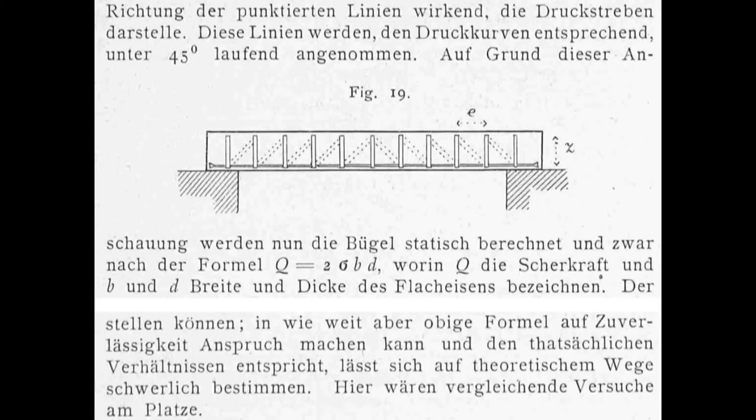I have to think about that. And maybe we can take that as a motto for this evening. It came to my mind that Wilhelm Ritter, professor at ETH, published that scheme in 1899 as a possible analysis of Hennebique's reinforcing system for reinforced concrete. He said he imagines a truss with diagonals in the concrete under 45 degrees, and finally he said it would be good to prove that with some tests. So this was thinking, this was speculating. And finally he anticipated today's standard. So I think this can be an illustration for the power of thinking in the sense of Bodenheimer.

Applying this to the design process, I tried to schematically represent that by these three elements: thinking, writing, and then precisely drawing. That's one possibility. On the opposite, sketching, following visions, dreaming - two completely different ways of obtaining a design, or designing by convention. This is not bad, this is something we often do. You take a precedent, you adapt it to the problem you have to solve. It's good for that way if you know history.

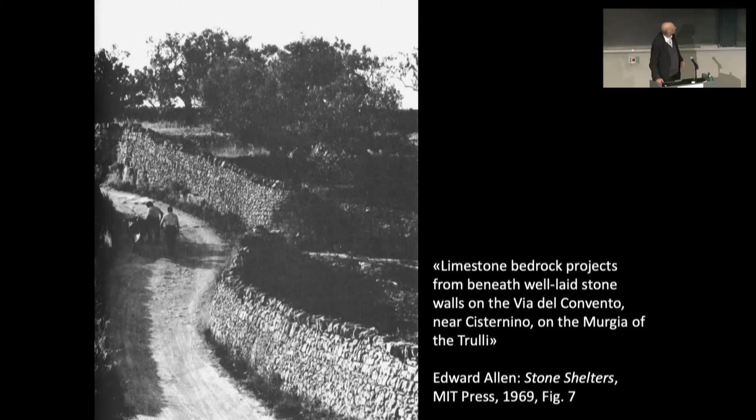Look at this strata in these walls, and this is one of the walls I analyzed for the Rhaetian Railway. Also limestone, stratified with always one smooth surface and one rough head. And look at that corner, how this is built and how it matches the natural rock face, and how the upper part is done with these interlocking vertical stones. I'm very passionate about such things.

Another very beautiful photo by Ed Allen from Italy, this interplay of road and landscape. I will come back to that photo at the end of the lecture. And also that has some familiarity with some of my own works, these stairs and these transitions, not always very clear between the built and the natural. A great book, these stone shelters.

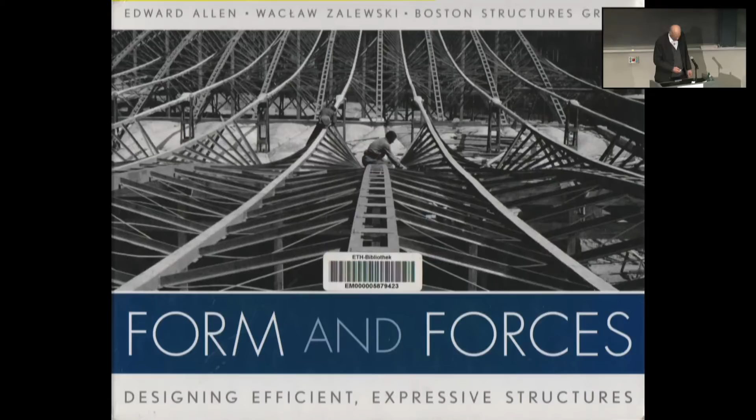Coming back to form and forces, I feel highly indebted to that culture established by Allen with this passion for rationality. I think there has been some changes in the attitude of engineers around 1980, which were also responsible for my shift for some years to the architect's office. And I maybe can illustrate that.

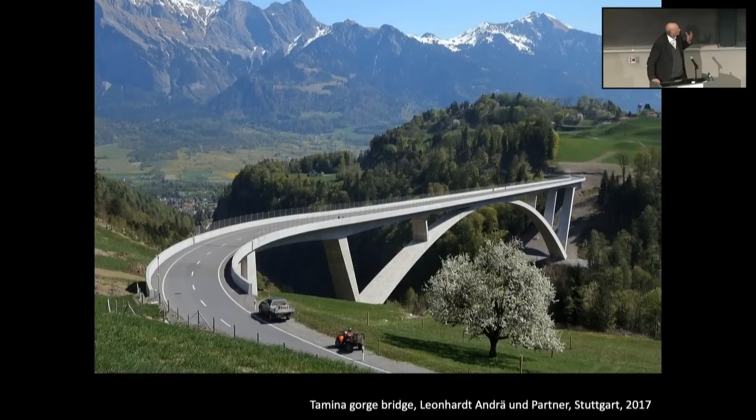This is a bridge not far from my home, an immense arch bridge, spanning 265 meters, built by cantilevering out in successive phases in concrete. This is the moment where the two cantilevers meet. It was the result of a competition, and the jury praised the slenderness and the transparency of this design. And certainly this is an impressive work.

Looking at the longitudinal section, you see from here till here, the arch has the section of a full rectangular concrete section, almost 3 meters high. The arch has a continuous curvature. You have an immense span from here to here. So, looking at that, it's very clear: there was a will to form a priori, which was then done by the calculating engineers to realize that intentional form. So this is a piece of art.

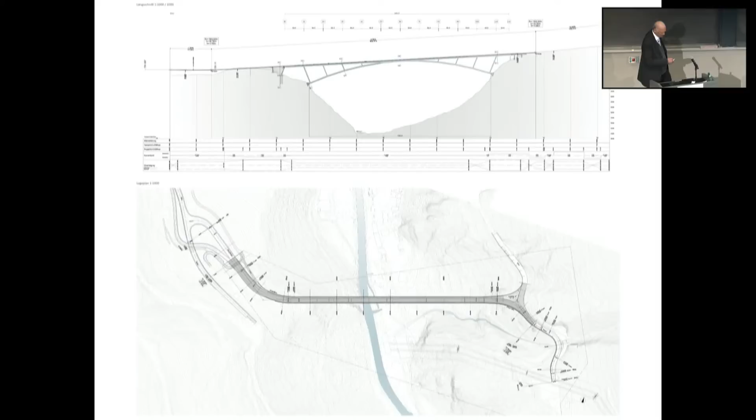Another bridge, which at first gaze may look similar, but only at first gaze. It was the result of another competition last year, also a big arch bridge. The position of the bridge could be chosen by the engineers. And so, happily, Schlaich Bergermann and our firm won this competition with the shortest bridge of all the entries and the longest span. This is already a concept.

Shortest bridge, longest span. This implies that the impact on the landscape is very small, whereas other projects had a shorter arch but a longer bridge and a bigger impact. So the jury decided for the smallest impact on the landscape, but looking at the bridge in detail, it has significant differences to the Tamina Bridge.

It's of steel, lightweight steel. It has a polygonal arch. And everything is conceived to the uppermost rationality in this position of the bridge.

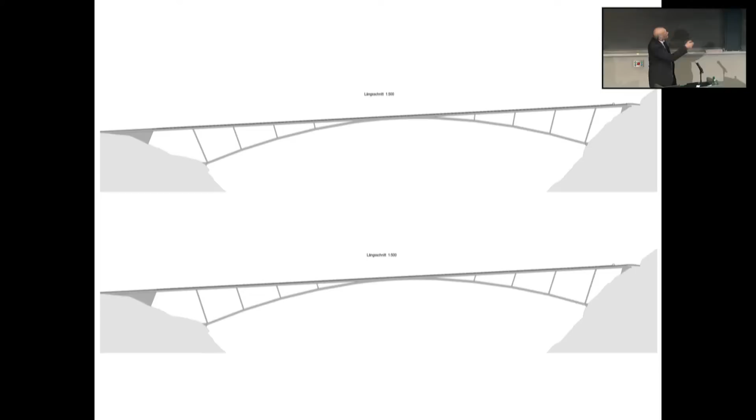Next week, I will have a serious debate with Andreas Keil from Schlaich Bergermann, because Keil wants these pillars to be parallel. I want them to be radial. And Ed Allen certainly will help me in that discussion. So, another example to show this tradition which goes on.

Now it's high time to present a little bit what we are doing. This is Switzerland: Zürich, Chur, St. Moritz, Bondo - we will come back to that place - Poschiavo also.

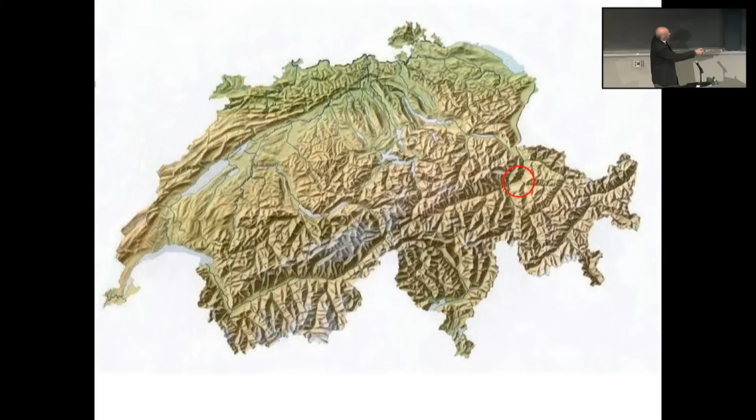And these are my partners. Gianfranco Bronzini on the right, we've collaborated 30 years. Now Peter Henry, the youngest, 45 years old. Josef Dora, also a very long companion. Myself, 66 years, the others 55 years. This is a good distribution of age to guarantee a certain continuity.

So for today, I thought in a first part I want to have a retrospective chapter on personalities which have influenced me during my lifetime, and I will present one project of each of these three people which is important for me. Then we will make a short intermezzo, and in the second part I will present some of my own projects. And as I said in the beginning, as I want to talk about thinking, this can be very short - I'll just show the most important aspects of these projects.

And then finally, the Orrido di Cavaglia and the Bondo infrastructure - these are two projects that deal with landscape, which I would like to present in a bit broader way.

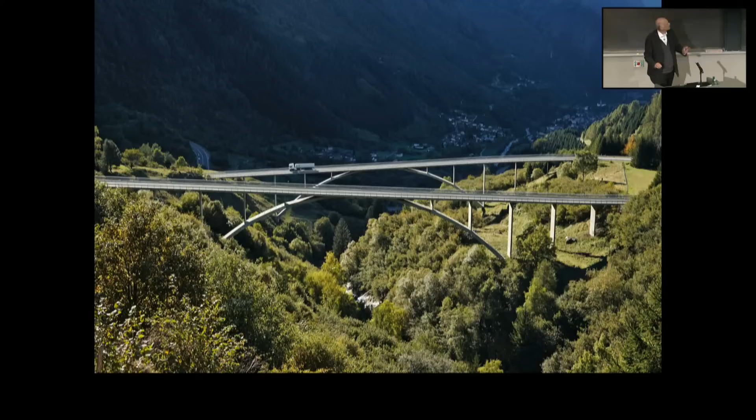Okay, I used many photos from friends or from the internet. Christian Menn, you might know as the engineer of the Bunker Hill Bridge over the Charles River. He was professor at ETH, he was my professor too. And in the 1960s, he invented this elegant arch bridge system with a post-tensioned hollow box stiffening girder on top and a very slender, rectangularly sectioned arch.

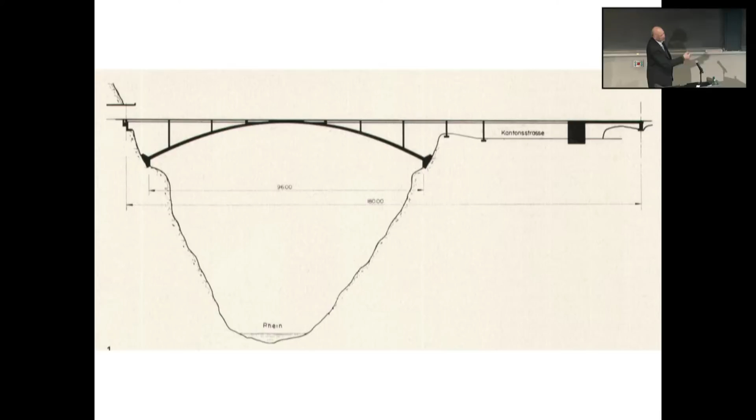He said a big challenge was this crossing at a flat angle, a big span which dimensioned the hollow box section. And then he took this section over the whole bridge and added the arch, which is stiffened by the hollow box section. As there is this curvature in plan, he shifted these walls as much as possible away from the springs of the arch to avoid too much horizontal eccentricity.

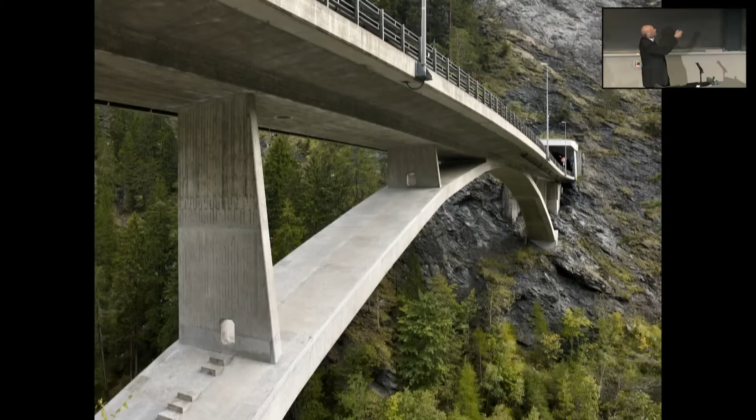You see it here, this is the last pillar, asymmetric, and after that the driving way turns left. And on the other side it's similar. And now he wrote something very important - these are the different sections of this bridge.

He said that once you have found the relationships between all these different elements - arch, pillars, and driving way - then the form-giving process reduces to choosing only a few parameters. And this is something which I consider as conceptual thinking, which has very much fascinated me as a method of working.

Robert Maillart, pioneer of reinforced concrete, he built the first deck-stiffened arch bridge in concrete in the world, in 1924.

It bridges an artificial lake. You see how high the water level can come. And for this reason, Maillart conceived all the submerged pieces very massive, and then he put this absolutely slender arch above it. This was really an invention that had a large influence until now.

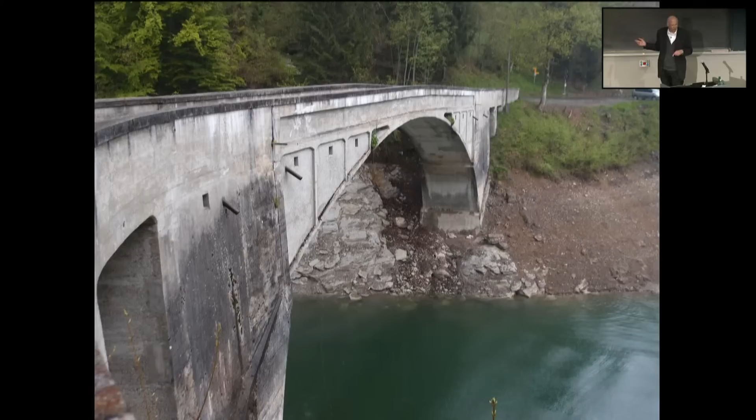And only after that, some opponents came and said, hey, this is an important work, you cannot demolish that. And then followed a struggle for years with court and anything. It ended up that our office got the job to investigate the feasibility of a restoration of the bridge.

This is the Lake Wägital with this bridge called Schräbach Bridge. This was the first big artificial lake in Switzerland, maybe the biggest also in Central Europe, with this huge dam going deep down into the earth. A very ambitious project. There were architects from Zürich, the Pfister brothers, who designed the crown of the wall. There was the director of ETH's engineering department, Arthur Rohn, as a consultant. So really a great work, and Schräbach Bridge was part of that.

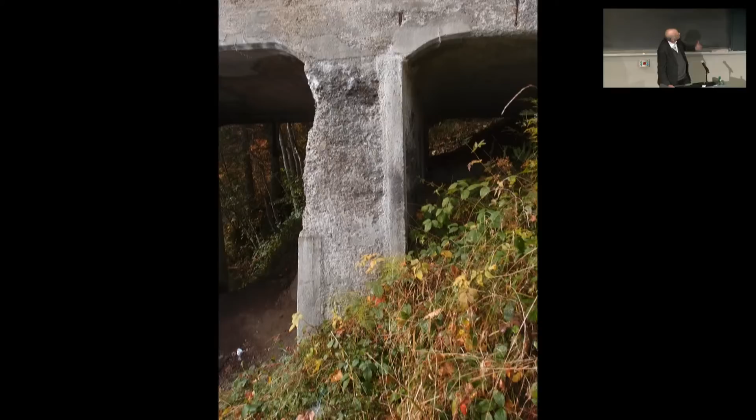I inspected the bridge, spent many hours there looking at the damages. I mean these walls, these are bricks. They have no structural action.

Everybody agreed that a restoration would be the possibility, the chance to bring this bridge back to its original state, to enlighten the whole structure. That was clear from the start.

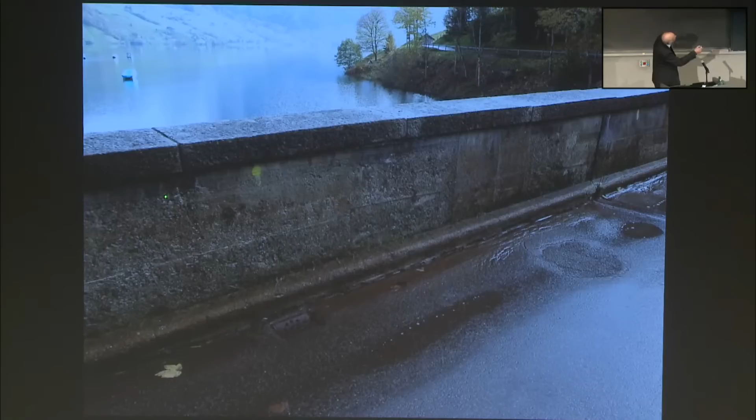I found some intriguing things. You see, there is a line. It comes back here. Along this line there is like a band, 7-8 centimeters, of hammered concrete. It reappears under the bridge here, very clear. I realized this is concrete from 1924, and this is concrete from 1932. And to have a proper junction between the two materials, the joint was hammered to make it regular. It goes on and on through the whole building.

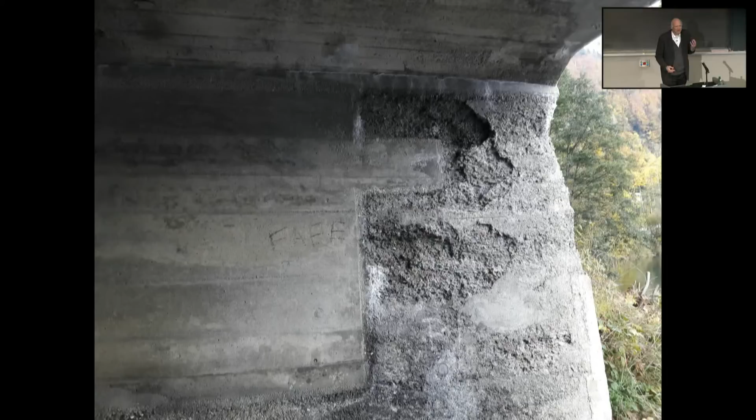Somehow I was fascinated by this pattern. Then the look from outside. Studying the reinforcing drawings, I realized the arch has no upper reinforcement. That Maillart did never again. This is a bold decision, and even if you could calculate that it could work, this is not such a good feeling. It made me a little bit scared.

And then you see these cracks. And somehow at that moment I was not so sure if this is a good idea to remove these walls. Of course, they are not structural, but maybe rather psychologically, it helps to give a certain trust.

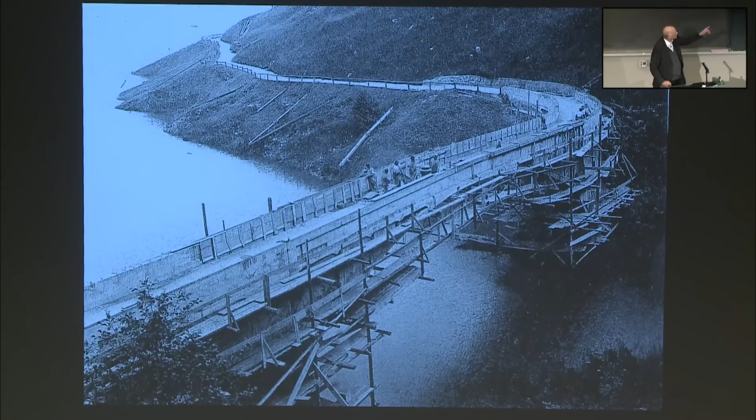Then the archivist of the power station found material in his archive. Look at that - this is 1932. This girder is in a formwork. This explains the line I showed first. I mean, this was surgery at open heart. You have this thin arch, and this is the stiffening element, and they worked on the stiffening element.

They take away all the bad concrete. This is proof that the drawings are right: one bar, diameter 12 millimeters, every 30 centimeters. That's not very much. And then this drawing, not by Maillart but by the power station company, shows a wall on one side of the section.

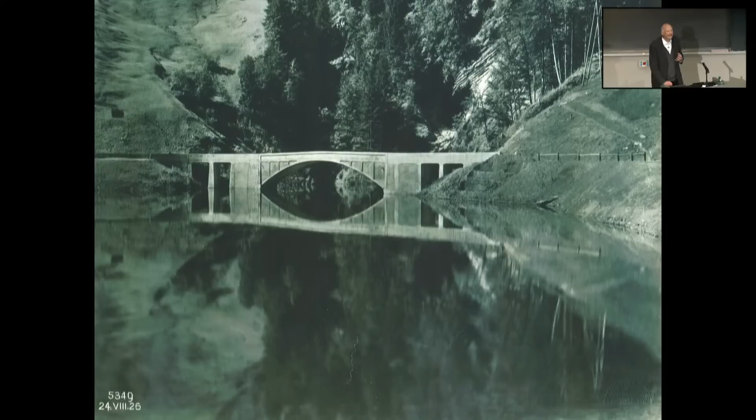And it goes on - this photograph, the oldest photograph of that bridge, August '26. Oh, the walls are already there. Who is the photographer? It's Wolf Bender, a renowned photographer specialized in architectural photography. He waited until the lake was full.

He waited until there was no wind to have the mirroring image of the bridge. And this is not just a photo, this is a tableau. After a while I thought, it's a beautiful image - beside Maillart and his work, but as an image, it's beautiful. This bas relief of the bridge with these walls.

And okay, there are no written documents, but it was clear that was Rohn and the Pfister brothers, because they also had built bridges together at other locations, and they always had this neoclassical attitude. And as I said, this was an ambitious project - they just could not stand Maillart's little pieces. They made it in a decent way, but these walls are there for aesthetic reasons.

And that changed my attitude another way, because this was not accidental - this was intentional, from conservative but good, interesting architects. And as I said before, for structural reasons I was reluctant to remove these walls, but now also for historical reasons, for having this bridge as a testimony of the discussions in '25, I came to the conclusion this must stay, this must be polished, this must be better. In the middle, these two were missing since '32. We thought of re-establishing that, and then I started to think...

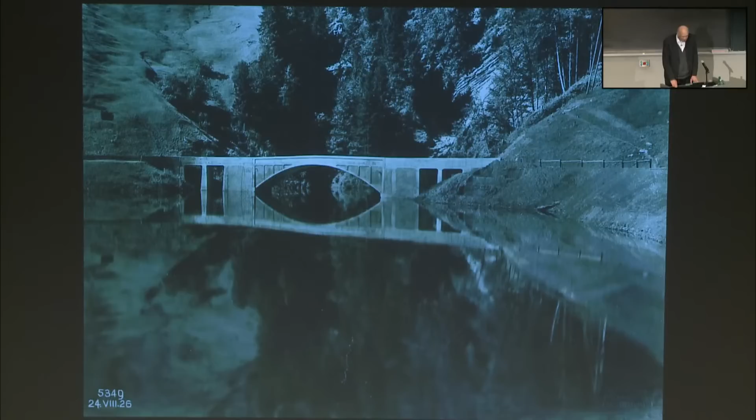And thinking brought out that.

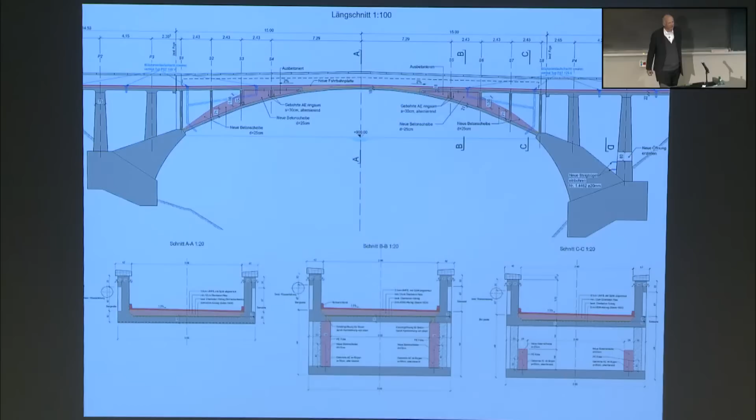These are the walls, and it's not a problem to make these small walls out of structural concrete behind these aesthetic walls. We transformed the bridge into a Salginatobel system, which with a very small amount of concrete almost doubled the load-bearing capacity of the bridge. And it had the advantage that we did not have to care about the balustrades anymore.

We tightened it. There was an infill of concrete, I don't know why, but we exchanged that - there were some bad elements in it. We replaced that and covered it by an ultra-high strength layer of concrete to make the whole thing watertight. This is some of the most important thing.

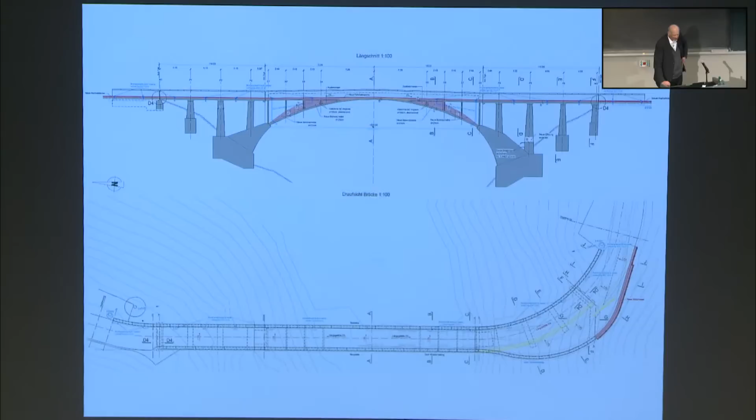As the owners of the bridge wanted to use it for transports of wood from the forest, they had a problem with the narrow curve, so we enlarged that curve on the south side. On the not so visible side, that was just a tribute to make the bridge usable again.

And very important, always the mock-ups. My wife was a primary school teacher, and at the age of 30, she made an apprenticeship as a furniture maker, and after a while she specialized in model making for our office. She makes such great models. So we tested the support of that enlargement on the model.

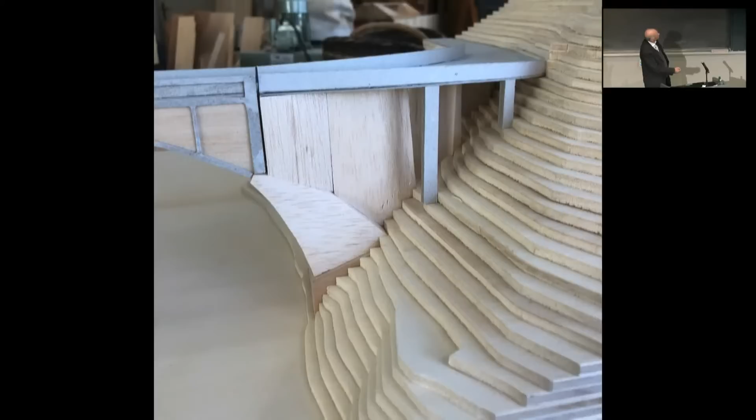3 additional pillars looked not very convincing. 2, neither - that's not good. Enlarge the existing pillar in the background is better. Enlarge it with a skew face is even more better.

So that was it. I presented the model to the conservationists of the canton and to the clients, and they all said, oh, this is a very interesting proposal. And so, I also showed that the cost of this was half of the new bridge. So we could do it.

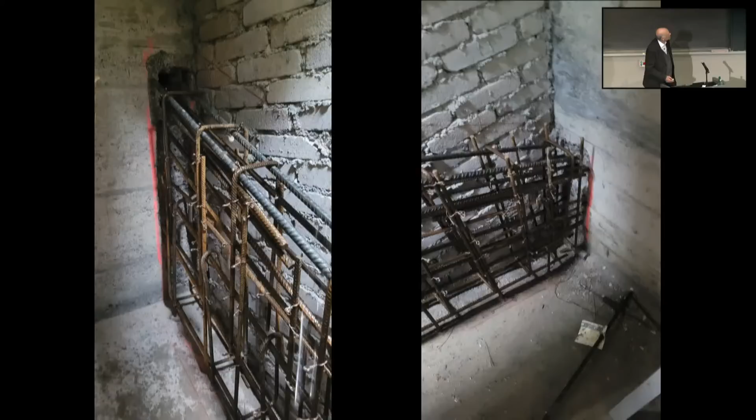Bridge restoration in Switzerland today. I mean, I got a letter from a colleague saying what the hell do you here? I mean, it looks so rough. It's not what people maybe expect from you, but I mean, we saved the bridge. We strengthened it, we tightened it, we saved a lot of money, and we said, this is part of the history of the whole thing.

It's maybe still not the most beautiful thing you can imagine, but this doesn't matter. It's such an interesting story, also about Maillart and a certain failure, and what develops out of this, and this kind of enemies in the aesthetic sense.

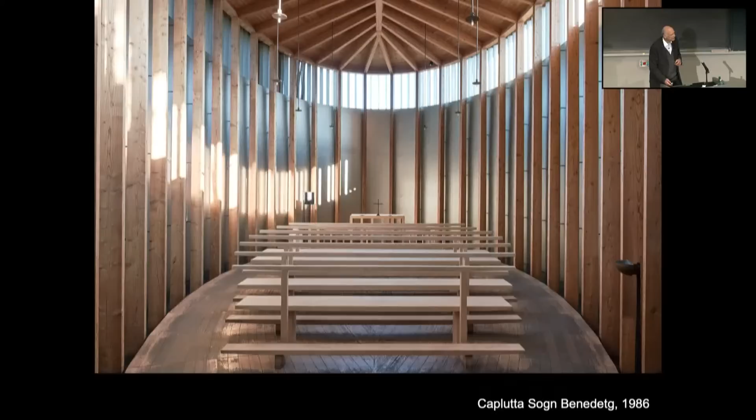It was a competition. He drew the plan by hand, and I proposed to follow a mathematical function for this plan. And after some debates, it ended with the Lemniscate as a directrix form for the plan.

It was 1986. I had my first personal computer. I made a spreadsheet for calculating the length of the Lemniscate. It took 1 hour to calculate that at that time.

And then we divided that length into 37 pieces to get a regular distance of the pillars. I did the work twice because after a while we found out it's not the pillars which are important, but the windows. So now the windows are regularly spaced along the whole length, and this explains that distribution of pillars at that point. Okay, so far done.

Now, the rafters are perpendicular to the contour line. This defines the intersection points along the central axis. Then, the incline of the rafters is 1/3, constant for all the rafters. This defines the longitudinal line of the roof.

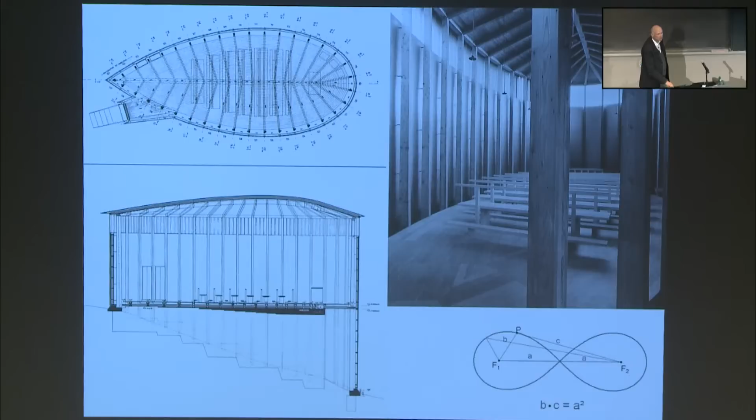Finally, this is exactly the same procedure as Menn did with his bridge. We developed a system of interdependencies, and finally, it was to choose length, width, height, and slope of the roof. And then the thing was fixed. So I think this is interesting - the same way of thinking in a bridge, in a chapel.

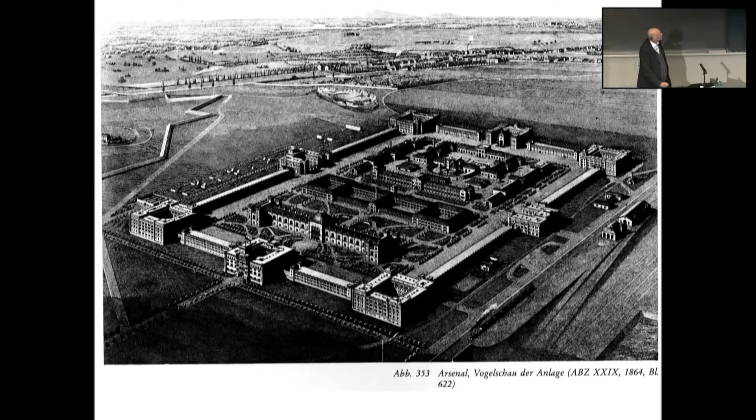Otto Antonio Graf collected all the drawings, all the works by Wagner in several volumes. And one volume is dedicated to Wagner's teachers, Sicardsburg and van der Nüll. These teachers built the Arsenal in Vienna. What follows now is the analysis by Otto Antonio Graf.

From the plan, he comes to the entrance door, and finally, he shows how every rectangle of this door, every hexagonal ornament corresponds to one point in the plan of the whole area. This is interesting.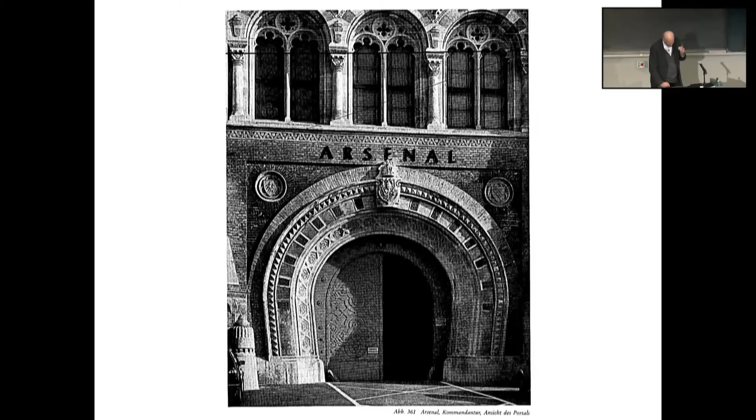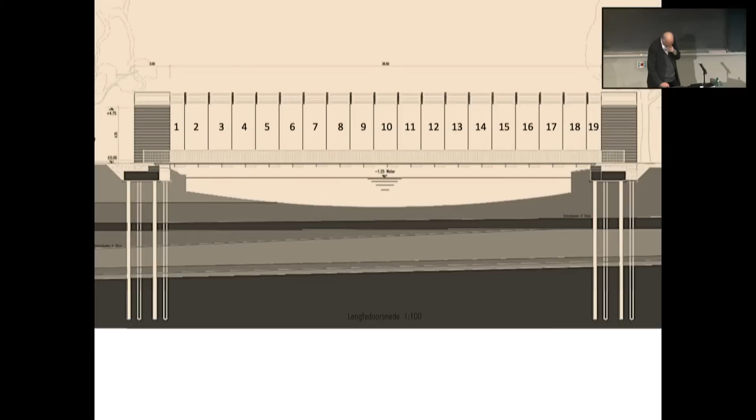I remember when I told the draftswoman, hey, put one piece more, it looks better. But this was all. This was, of course, not a conscious decision, but it's somehow intriguing how you are dominated by things you don't know.

One of these stone slabs, turn down the height, multiply by 12.167, you have the whole bridge. There is an error of 41 millimeters, which you have to excuse, but again, these are things.

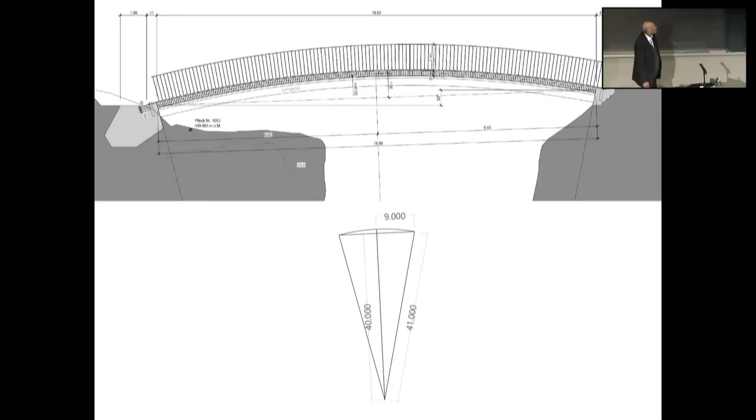The falling water bridge, a slender stone arch. I spent a lot of time determining the rise and the thickness of the slabs and the amount of post-tensioning. Finally, what came out, also, I realized afterwards, a beautiful triangle, 9, 40, 41. That's more interesting than the 3, 4, 5.

A suspension bridge over the Rhine River we built some years ago. Also, when finished, I prepared a presentation. I had rebuilt George Washington Bridge in the scale of 1/12. It would be ridiculous to start work like this, but to find out how deep this George Washington is carved into my mind, it's such a funny thing.

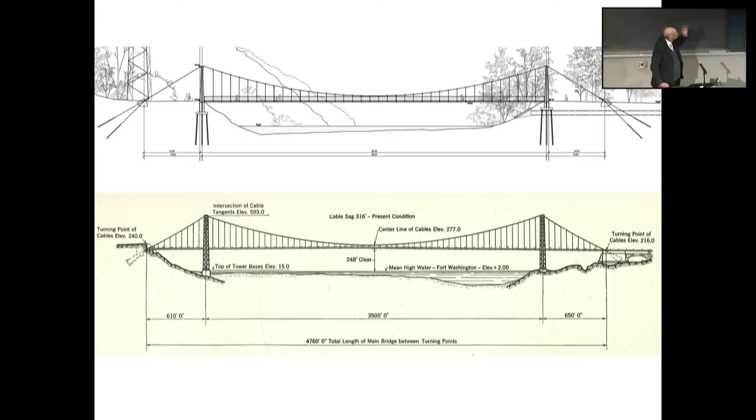Okay, let's stop with that, but this is maybe a conventional design, as I mentioned at the beginning, but conventional does not mean very easy. It was hard work to master all these details, all these different phases of erection, but it also had its qualities, the footings of the stiffening girder, and the cook-in-chief who proudly presents his steelwork fitting together. Okay, so far so good, but I wanted to give some remarks about feeling uneasy.

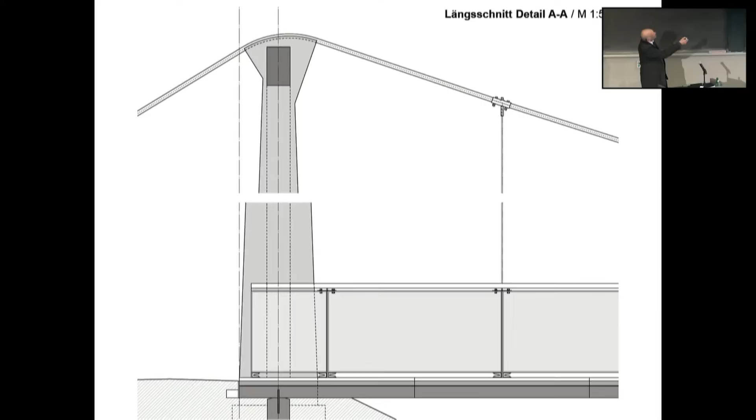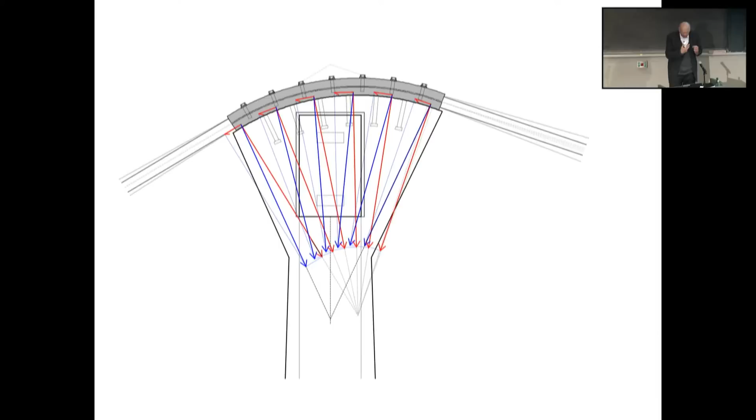This was, at the beginning, the head with just rectangular lines on the cable. Of course, this looks odd. And later on, we found out that the forces, of course, do not go perpendicular to the cable, but there is an amount of friction because this is another slope than here, and so the longitudinal force in the cable changes. So we corrected the shape to these black lines. And still I had the feeling of something neck-breaking, which I could not explain because everything is so clear.

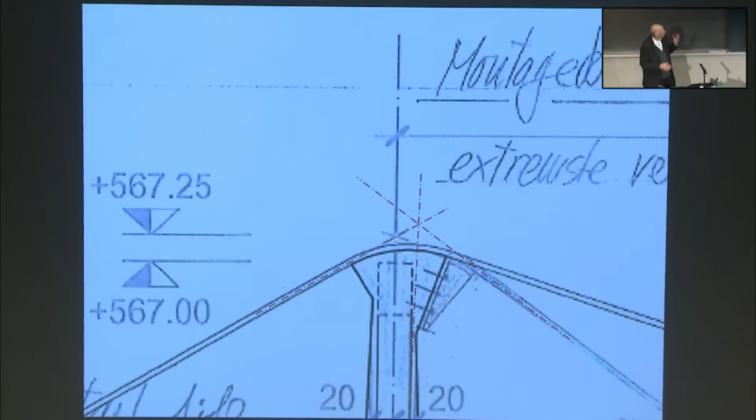And it was only later that I found out that the deformations are very big during the construction process. We intended to put the steel socket here to avoid kinks in the main cables. And now, if you look at that, the intersection point shifts, and the resultant force is outside, or almost outside the section. Okay, once the problem was seen, we could handle it. But this was like something present in some way as an unsettling thing which had to be analyzed and rationalized to overcome.

The finished bridge has handrails at a height of 1.30 meters because it's used by cyclists, and I also was not so sure if this is a good height for a handrail, but as you see, people like it for their elbows.

Okay, last part of this intermezzo: cultural background. It's not only that there is a structural culture for bridges and so, but they can also be background for another type of culture. So the 5 arches here, the 5 arches there, the king of pasta, Pietro Barilla, with his artists.

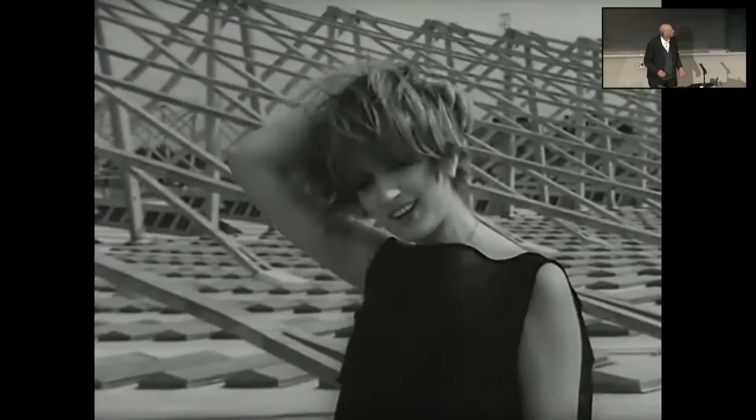Architect, scenographer Piero Gherardi, who designed a lot of clothes, made a film for Barilla pasta with Mina Mazzini as a cantautrice. And here she sings Mai sarà così on the roof of the Fiumicino airport in Rome, a structure by Riccardo Morandi. This is maybe the only country in the world where structures are background for singers.

Okay, now I come to some own projects. The first is a holiday house. There we had to build a wooden roof on a polygonal shape, and we used analogies to reinforced concrete. You see the house, you see the rafters in different spaces. Now the structure goes like that.

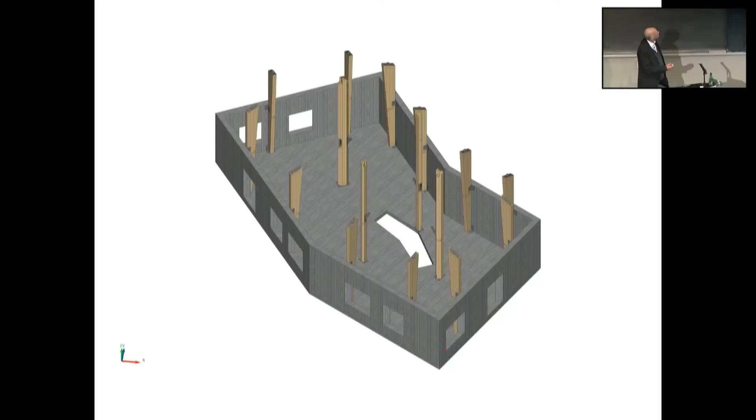There is a concrete plinth. Inside there are wooden posts, walls, a roof structure. The ridges here are not supported because the architect wanted to have free corners. There is a first layer of horizontal beams. Over the supports, this is densified with some short pieces.

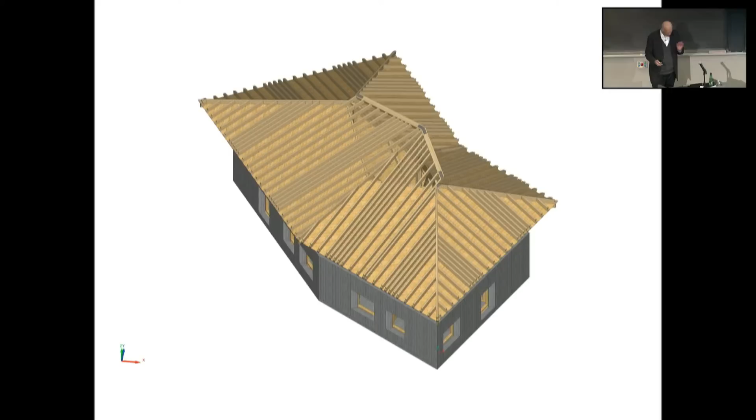Some panels, and then second layer, rafters. Again, the distance is differentiated along the needs of the structure. So this analogy to reinforced concrete is very economic because you put the material exactly there where you want. So this is the inside aspect of this house.

Shell structures in another way. This was a competition with Marcel Meili, Markus Peter. This is the site. On this site you see 8 strong pillars, and over these pillars we proposed a shell structure, not only for the roof, but a shell structure for the whole house. So in section, it looked like that.

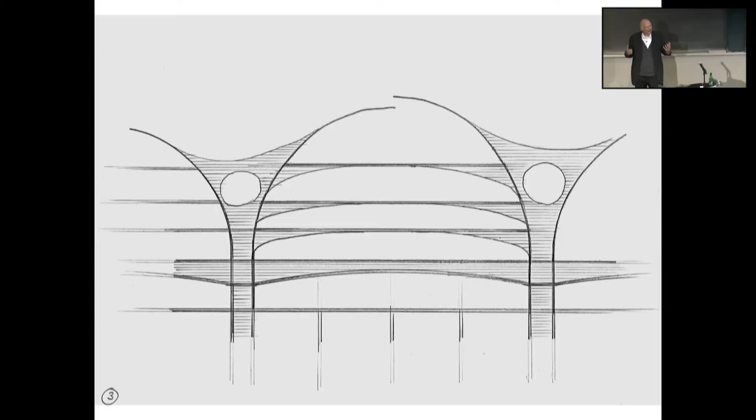I mean, here, everybody speaks about sustainability. And I think all the examples I showed until now were concerned with minimizing material. And also, I think if you take that seriously, we have to reinvent the shell structures in concrete, which are so efficient.

Okay, the plans, the sections. And this was the final presentation. Of course, we did not win. No. The winner was David Chipperfield with a neoclassic, serious building.

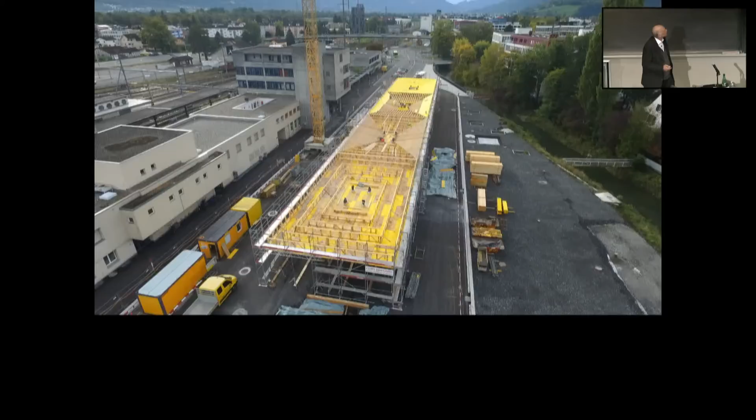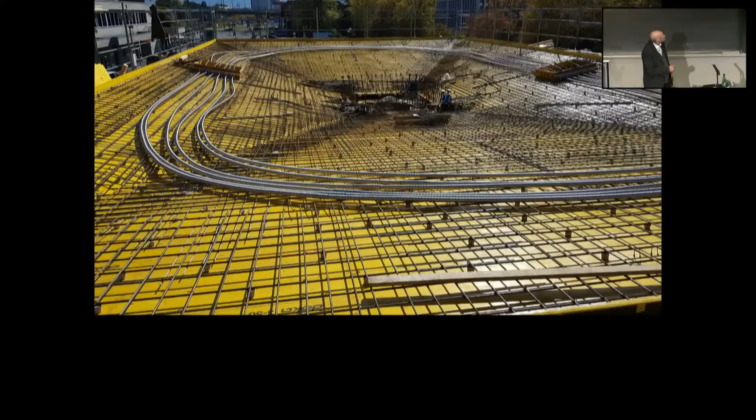If not shells, at least some folded works in concrete. A bus shelter, 4 independent structures, pure concrete, without any watertight layer, because they are independent, they are post-tensioned, they can shrink, they will have no cracks. This is the formwork going on. Reinforcement. Concrete.

Finished. Thin plates of concrete, I think in a beautiful relationship to the station building by architect Max Vogt, who made a series of remarkable buildings for the Federal Railways in Switzerland. Evening. The new concrete, the old concrete in the background. The old concrete and the new concrete in the background. Okay.

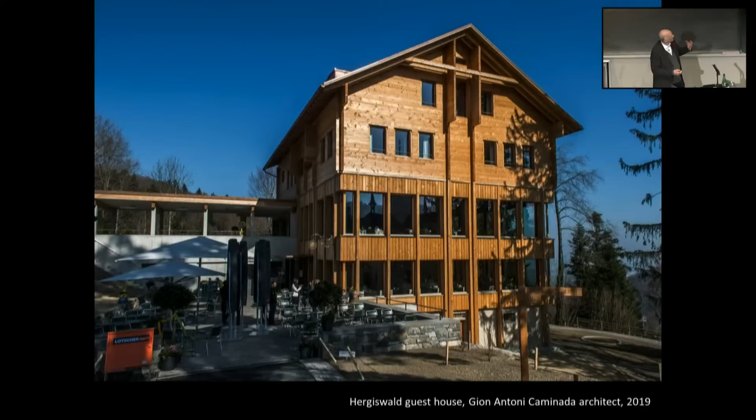An old common theme with Gion Caminada, the log buildings that move vertically. Here he had the job to create a guest house with big halls in the lower stories and rooms for guests in the upper part. So it's like a hybrid structure, high-tech in the lower part and old-fashioned in the upper part. The problem of the big halls was solved like this.

You have sort of a king post reaching up 2 stories inside the inhabited part. But as there are these logs which move vertically, they are just guided by the king post. They can shrink. They are fixed here, only here. You see the tension beams of the king post here, supporting the slabs. And the logs outside are partially supported by outside pillars in front of the windows.

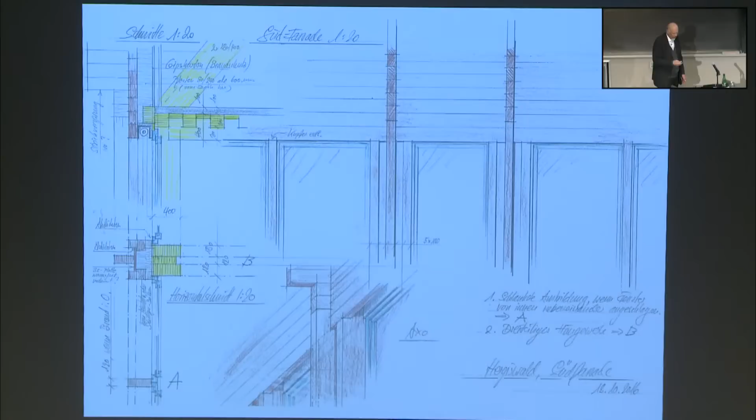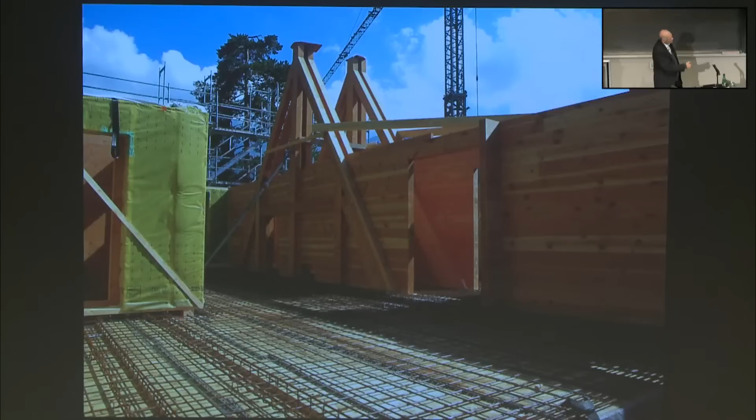Assembly of the king posts, the whole in its rough and in its finished state. The 2 pairs of king posts are filled with the logs without direct mechanical junction. And this is the finished structure combined with the staircase.

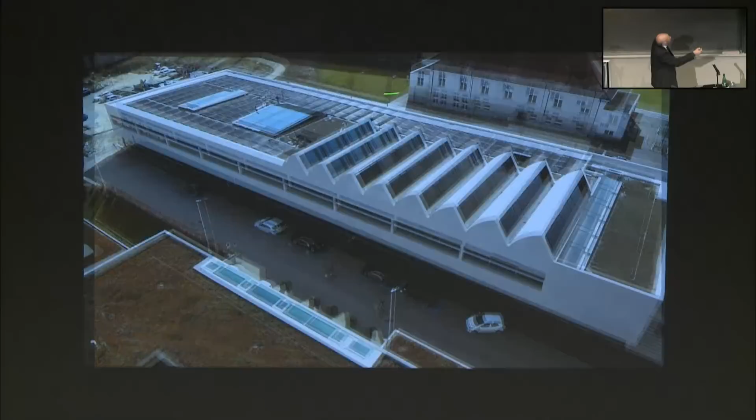So this was a vertically moving house, now a horizontally moving house, a schoolhouse made of concrete, 2 stories, and we proposed to hang up the outer facade on these bridge bearings here to make them breathe. It's a 70-meter long house. You see it here. So all that is monolithic, no joint. And all that can move. In summer, it expands. In winter, it shrinks.

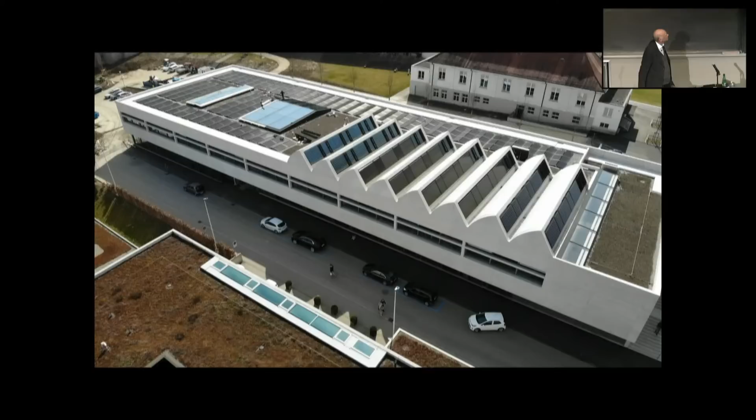Some small post-tensioning. So I think also this is a contribution to the durability of that building. It's not only an aesthetic decision, but it will not crack. It has no reason to crack because it can move. So all this is hanging. These are tension elements, and also the sheds are monolithically combined with the facade. Inside, it's a very beautiful cured concrete.

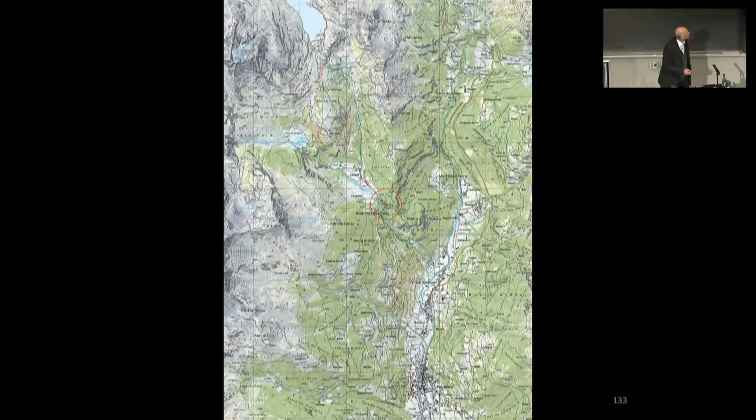Okay, I come to the 2 last landscape projects, the small one first, Orrido di Cavaglia. This is the Bernina Railway crossing the pass on 2,200 meters here and then going down, down, down. There is a plain called Cavaglia with a small gorge at its entrance, and then the train goes on to Poschiavo. And I was asked to do a path through that gorge. It was only about 100 meters long, but a very peculiar gorge.

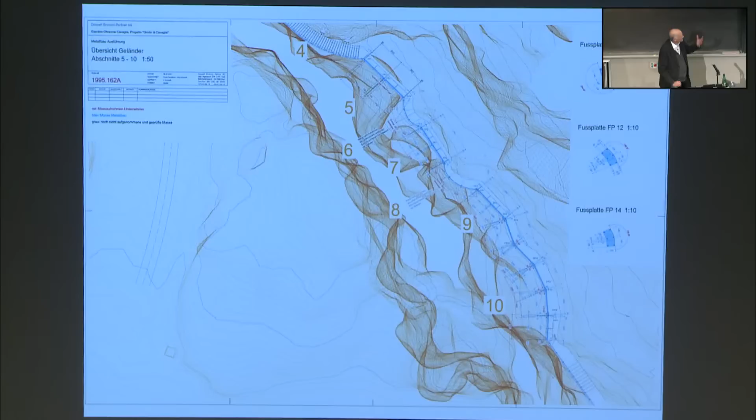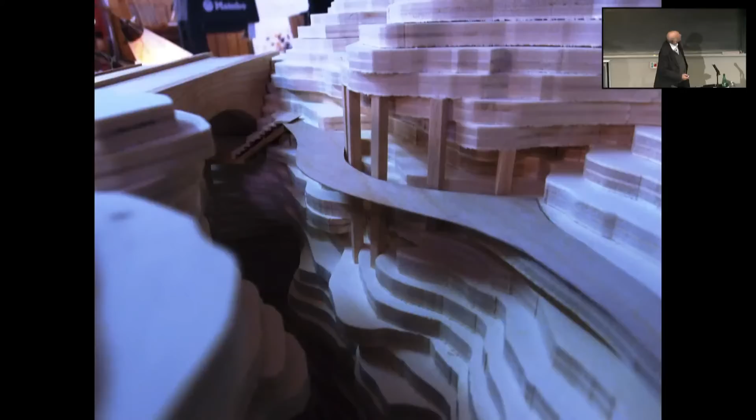This was coming from the surveyor, the level lines. You are lost with such a drawing, of course. And as always, first we built a model, and with the model we could find the alignment of that path. Just over these abysses of these gorges, there is a part of a protruding rock supported by pillars, which create some kind of a balcony. There is the railway bridge where we cross underneath on another bridge.

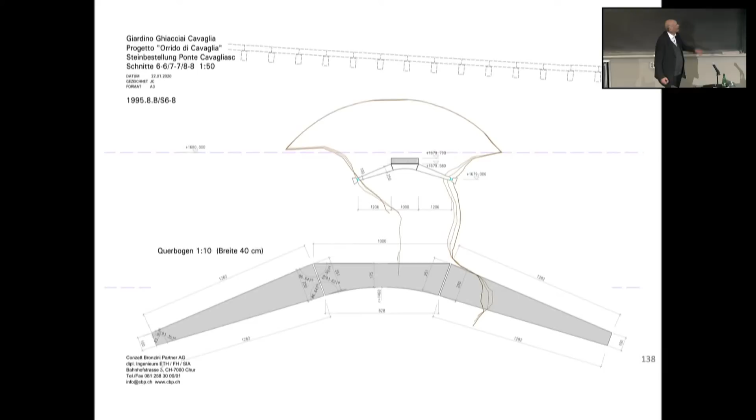The central aspect of this project was to use local stone in different ways. So we have the sawn local stone for the new bridge under the railway bridge with that transversal arch. In the first phase, this was traditionally masonry. Finally, we put there 3 big pieces, 1.30 meter, 3 pieces of stone like this, a bit like in a Gothic cathedral. We tested that, of course, because it's somehow a bold structure.

This is the balcony with these masonry pillars. Then there is a descent with stairs in a rather conventional way, like this. And we had one basic principle, which maybe is a bit astonishing in the whole context. We never went into the rock with the masonry. We did not want to have water going through the joints inside the rock and creating damages by frost.

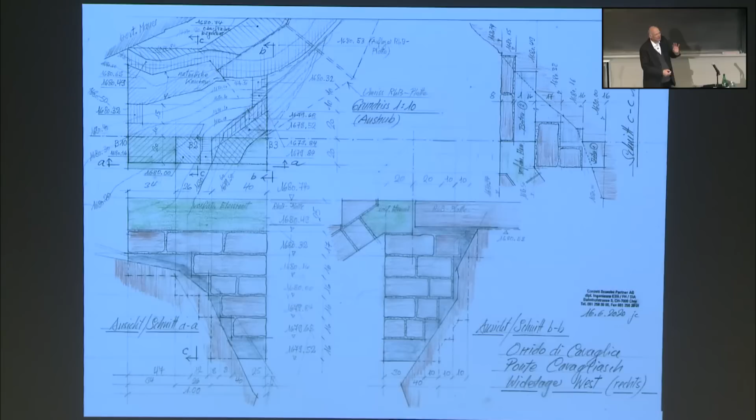So you always have a concrete plinth. Sometimes it must balance a little bit on the rock, but this is very hard rock, which allows for that. But there is never a direct contact between masonry and rock. So it's like here, you see the concrete coming out some centimeters of the rock. And yeah, also this was a nice, small experience in stone.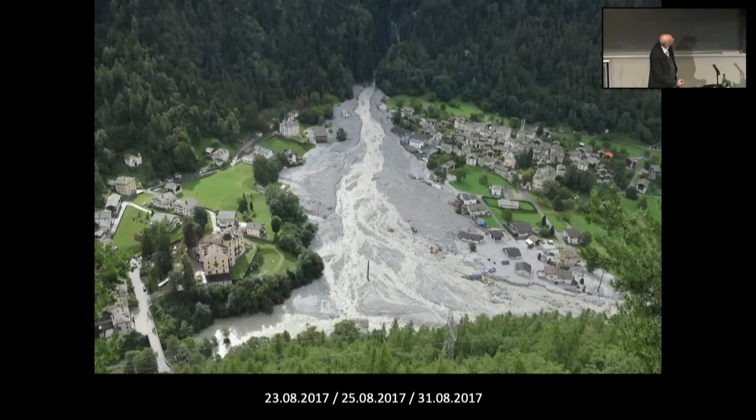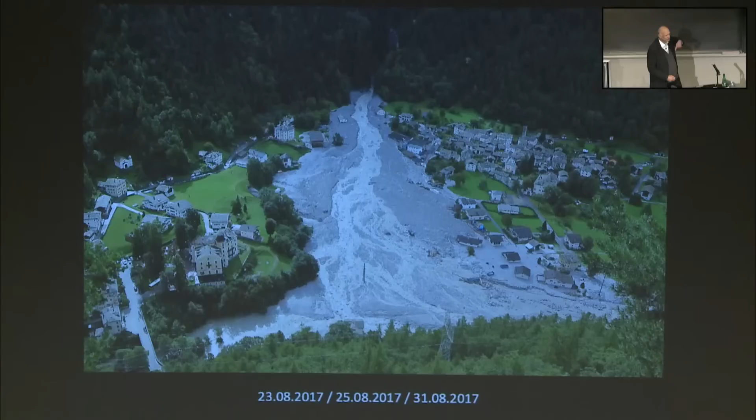But you see the tunnel entrance. The road went through here on a bridge, down there. The old road still intact. The connection between Promontogno and Bondo went through Punt there. And they dug out the material day and night because they knew more material would come. In fact, 3 times it came. And this is the so-called Punt, the old bridge. Here first damaged and then in the next flood completely destroyed.

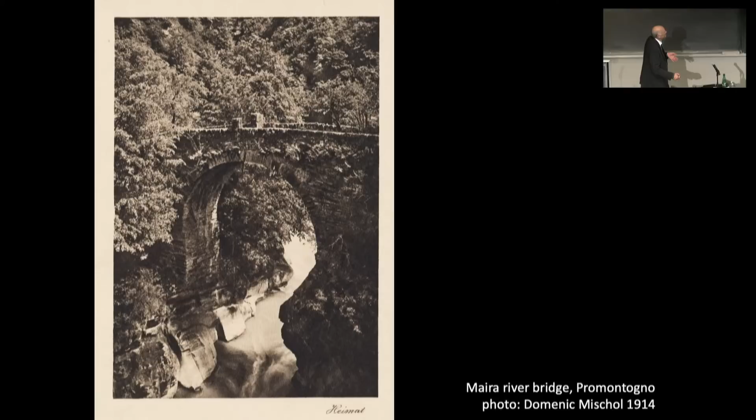At once emergency measures were taken, and then for creating a definitive solution there was a competition which we could win with a large group of specialists. And this project was based on, of course, a technical and robust background, but as well on a cultural background. And this is a photograph from 1914. It's just called Heimat. It shows one of these stone bridges. It's this bridge here. And also in other incidents in the last century, they always rebuilt their stone bridges.

This was very clear. Now our entry was to lift the road from this existing tunnel entrance and to span the Bondasca with a 65-meter span and then slowly go down again to the terrain. To emphasize the artificial character of this road, we proposed to build all with retaining walls of local stone. It's more or less the photo I have shown by Edward Allen at the beginning. So this is local stone.

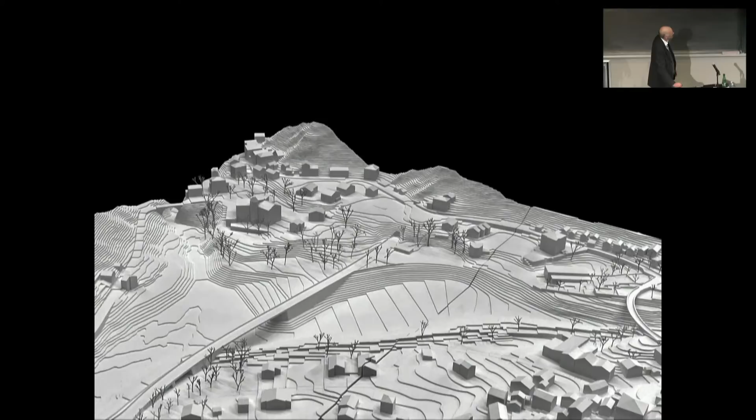And finally, some contractors from the village said, we can use the stone out of this deposit of the catastrophe. And this was somehow a good thing, that it at least gave some material for the new walls. And we had the advantage that we did not need to import the stones from somewhere. Of course, the bridge with 65 meters is not a stone bridge, but a concrete frame. And the frame has something to do with arches. We resisted the temptation to make a structure like a bowstring or something which goes up. And this was not only a technical decision, but also a culturally based decision.

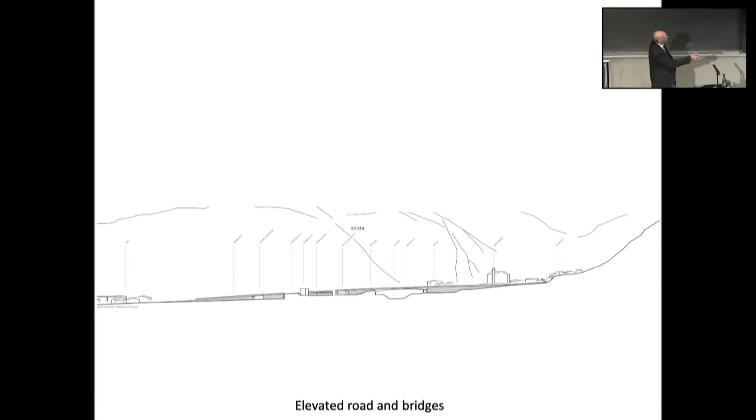So the longitudinal profile looks like that. The new road, almost horizontally, crosses the Bondasca Bridge, and then it goes down. This is Bondasca Bridge, right now under construction. And then we had to replace that small, nice Punt. Here was Punt, here. The road coming from there, crossing, going there.

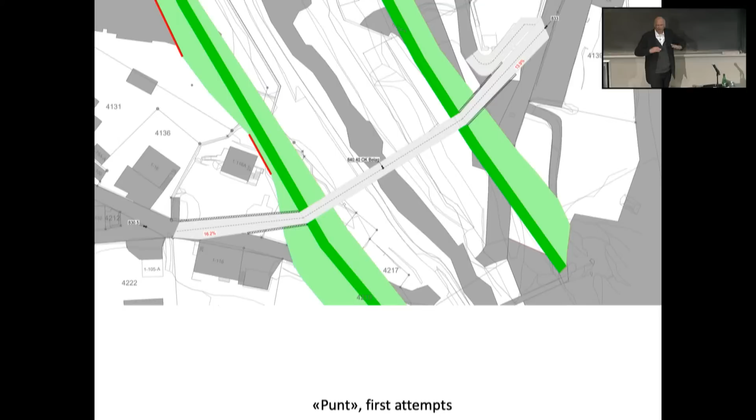And then we started to try some positions, but with the need for a flood profile for the Bondasca River, it became so steep, 16%. It was not good. And then I'd like to show you this example really for the way of designing by thinking. I just said we should not exceed a slope of 10% with these access roads. And now let's see what happens.

The old bridge here, we try to start as far away as possible. Okay, this is the plan, this is the 3D representation. So the access road goes here with 10% slope, and this defined that intersection point. We just varied this length, and we got to here with these 10%, and then the bridge is wrapped around this inclined cylinder which defines the flood profile.

Yeah, that was interesting somehow. Unforeseen also in the program of the competition, but was not thought to put this bridge in this position.

Then we had the tractrix of some cars going here, which enlarged the access road at these two points. And so it created the kind of bracket, which is in a way very special, that you have an existing road and now you turn 90 degrees, go over the bridge, and then you turn again 90 degrees. But somehow this is what happened.

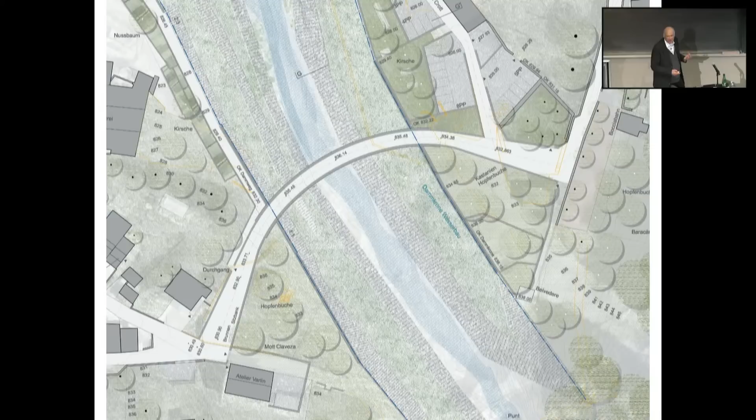It's a document of a destruction and the reaction on this destruction. And somehow this creates a viewpoint out of itself.

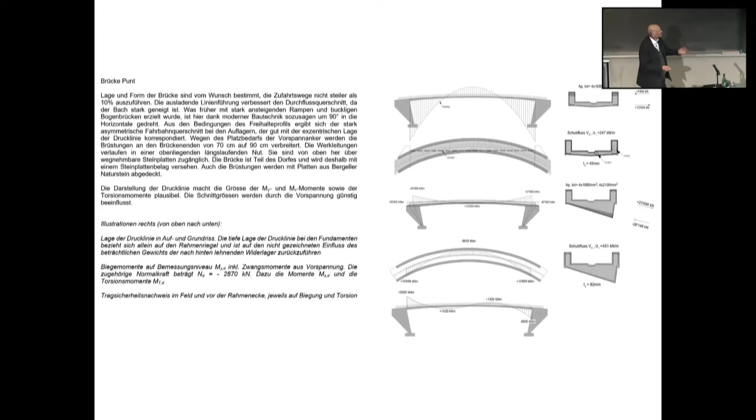And then we started to go more into details. At the middle, it's clear it's a trough section to minimize the structural height. And at the end of the frame, you need more depth underneath, and according to this inclined cylinder of the float profile, it's an asymmetric section. And it ended up like this.

And somehow the bridge developed itself, because this is great. Here are the biggest forces from the curvature in plan. This very eccentric section is perfect for that purpose, but it just developed itself.

Okay, many months later, we had almost finished the drawings for it. We had studied it in a 3D representation. We had made the renderings and so. And then, again, we decided to make a physical model.

Okay, Lydia is cutting out the piece for the bridge, which was a very complex thing. I had to draw, to make papers, there's developed lines, and so you see the plan, of course, and then here you see the lowest profile line of the girder, and you see also the upper profile.

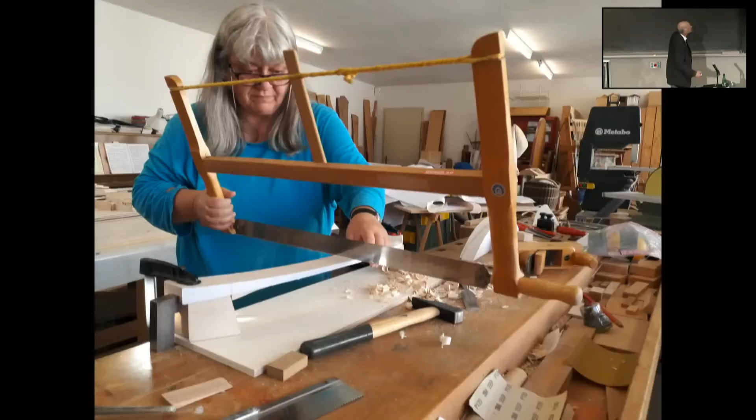Now she makes slices to get the upper profile. So gradually this mock-up develops. Of course, this is completely anachronistic, but that's how we work.

It may have been a reminiscence of the Schrebach bridge that in the competition we proposed to cover the walls of the trough by granite elements to emphasize the character of a footbridge.

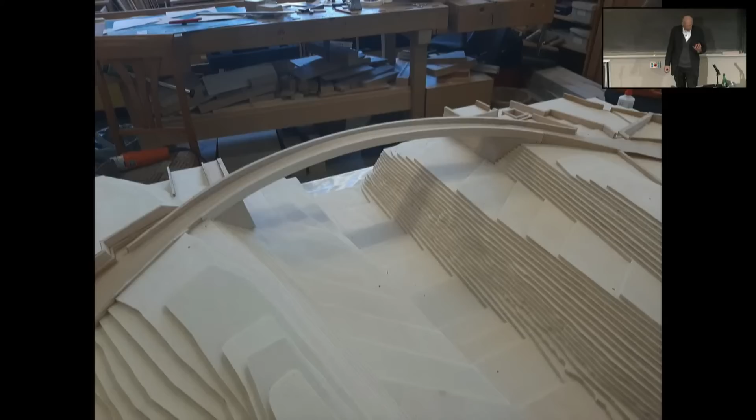And this was very clear. And then in the mock-up, this is symbolized of this covering. We took it away and it was much better. But this was something we only saw in this mock-up and not before. An important decision.

Then we had these intersection points like here, concrete, stone. And at the beginning we were very direct, but here it looks so odd. Also here, that's not possible. Finally, we realized that the access stone walls must have the same width like the parapets of the bridge. All that we found out only because we did that model.

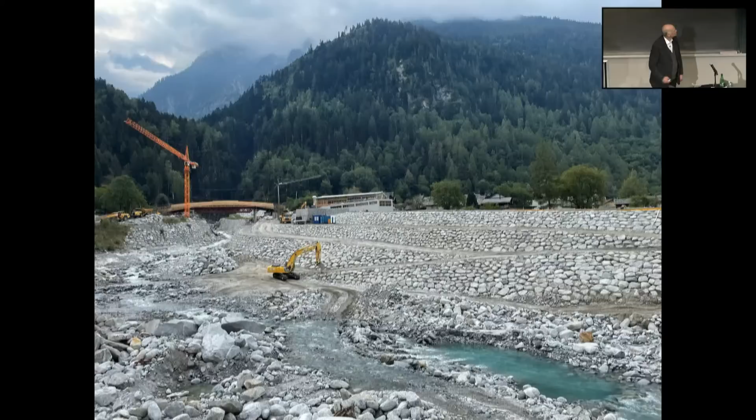So that's the final version of the project. Actually, it looks like that. This is Punt on the scaffolding. From upside down, this is Bondasca Bridge.

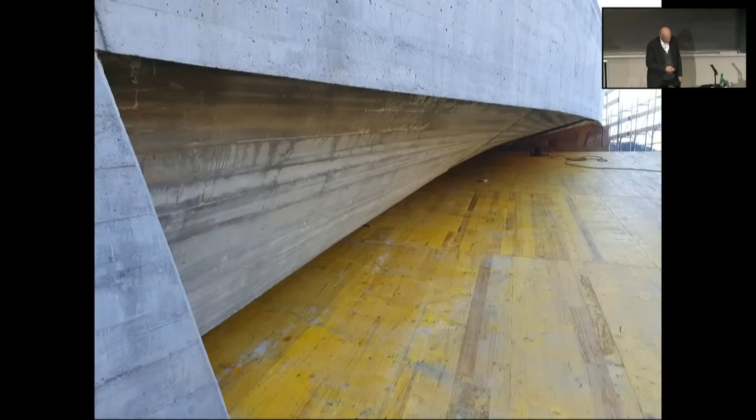And 10 days ago, the butterfly leaves his cocoon. This is the parabola of the fifth degree for Punt, now realized. Okay, I thank you for your attention.